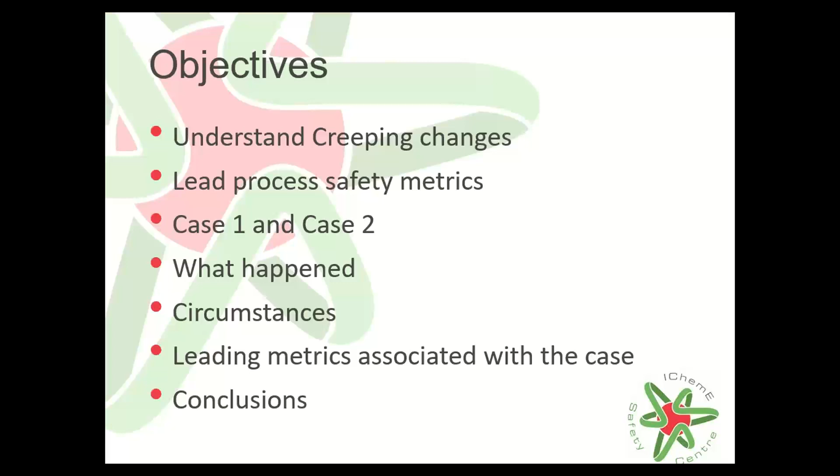And in the end, it's really interesting that I will jump into the details about what can you do as a manager, what can you do as a supervisor or process engineer, and what can you do as an operator. Those learning points are really, really dedicated and focused on these roles separately.

That makes the difference, because when you have any investigation report and all the recommendations, like hundreds of them, obviously you go through them, but be honest to yourself, you forget most of them, except for those of you who have exceptionally good skills and remember everything. Coming from my experience, sometimes I just forget some of the recommendations.

Now, in this case, you can see that, okay, I'm an operator. What is that important issue that I have to pay attention to in this case? So that's the difference, the structured way.

First example - these are not yet the case studies, these are just to set the scene and make you more understanding of what creeping change is about. I don't know if you are familiar with the Royal Air Force Nimrod accident that occurred in 2006, but this is a prime example of creeping changes, and that is an interesting case to see.

What happened: this particular RAF Nimrod suffered a catastrophic mid-air fire, and it was on a routine mission in Afghanistan in 2006, which unfortunately led to the total loss of the aircraft and the death of all 14 service personnel on board. The direct cause was not enemy fire, but leaking fuel being ignited by an exposed hot crossfeed pipe. The deeper causes were, as you can expect, organizational and managerial.

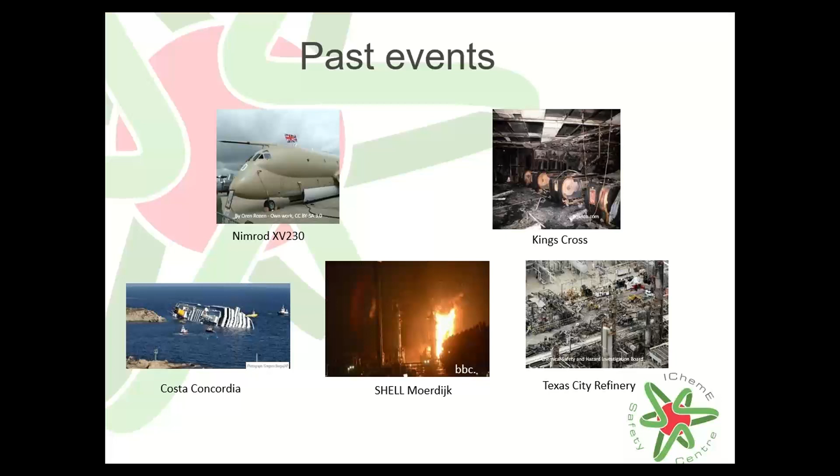accumulated, basically. So if you think about creeping changes, these are a couple of examples, because I could potentially flood you with all these accidents here, but we obviously don't have time for that. Just to give you a hint of what I want to talk about. And if I struggle with words, it's because I'm so excited about this topic.

Apologies for that. And I can give you even a definition if you want, because people really, really like definitions. So what are creeping changes? How can I identify what I'm talking about? This is an accumulation, coming originally from the HSE: an accumulation of minor, teeny tiny changes, which are often ignored or even accepted as the new norm, but which over time can add up to a big change and ultimately lead to a major incident.

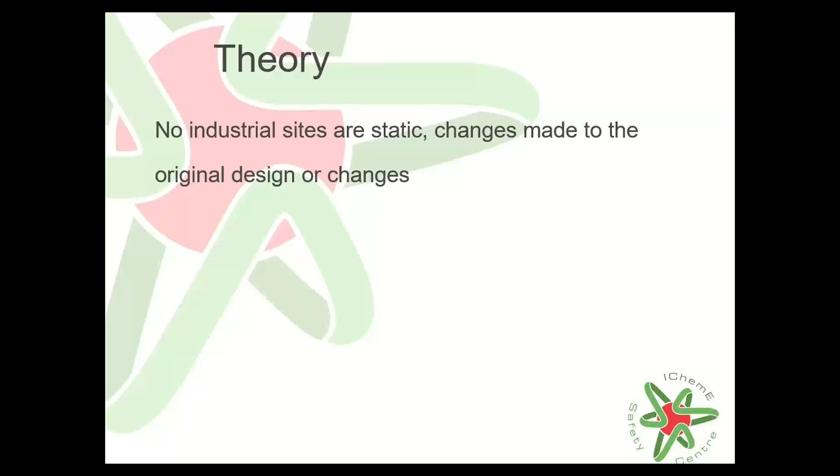And what are the changes we are talking about compared to the original design? It can be because of aging of the facility. Now we have more and more aging assets, obviously, because those industrial sites were built earlier in the 20th century, so they are obviously aging and coming to the end of their life cycle.

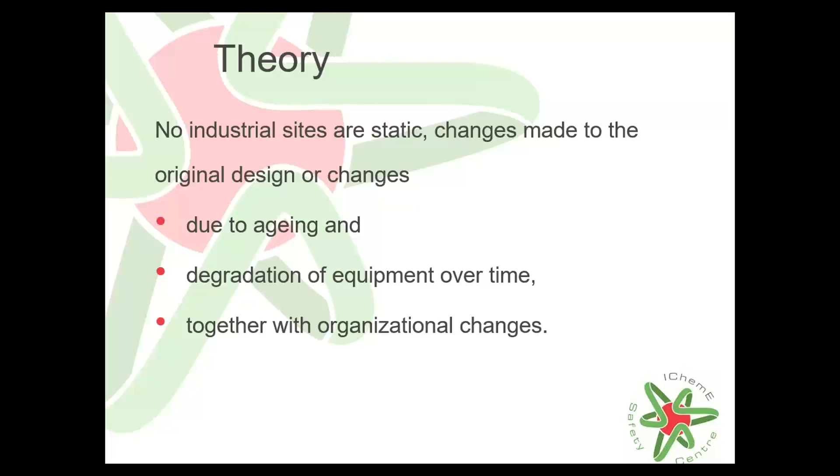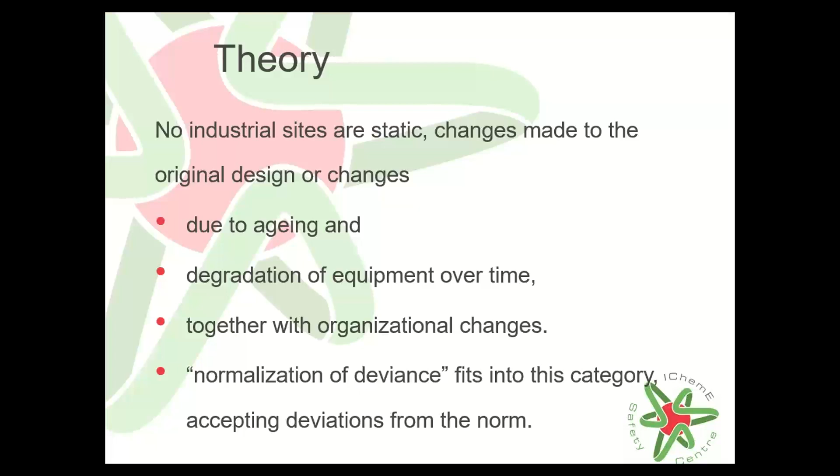It could be because of degradation of equipment over time, together with organizational changes. Mind you, we are not only talking about equipment or technical materials, but organizational changes as well. And I already mentioned normalization of deviance, which completely fits into this category of creeping changes.

Now I'd like to show you the main aspects and features that you can associate with creeping changes. If you'd like, please add your particular features or thoughts around creeping changes to the question box. This can be physical degradation, physical changes to the equipment, to the installation, to the plant.

It could be organizational change, change in ownership. That was one publication recently released by the OECD Working Group on Chemical Accidents, which is a really, really good read. Or when you alter from the original design for some reason, and this is happening basically very, very frequently.

Or you have new processes in place or modified processes, or you are losing skills and knowledge, or hiring new people to your operation. So that could also happen. And there is also an aspect of creeping changes when you change the culture within the company.

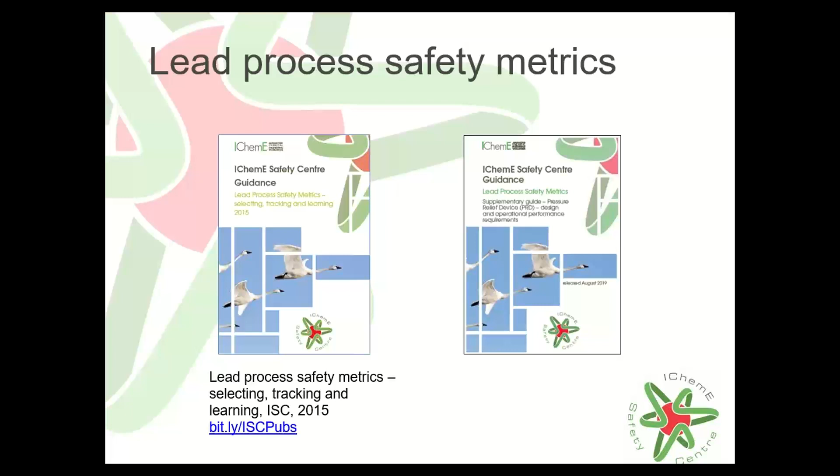This is about lead process safety metrics. And the other guidance document is a supplementary guidance document around pressure relief device design and operational performance requirements. What you can find in these guidance documents is that we work around 6 elements.

This is the 6 pillars, or the framework, by the IChemE Safety Center: knowledge and competence, engineering and design, systems and procedures, assurance, human factors, and culture. We are working around these elements, underpinned by leadership. Leadership is crucial to all of these elements, and there are 21 lead process safety metrics identified.

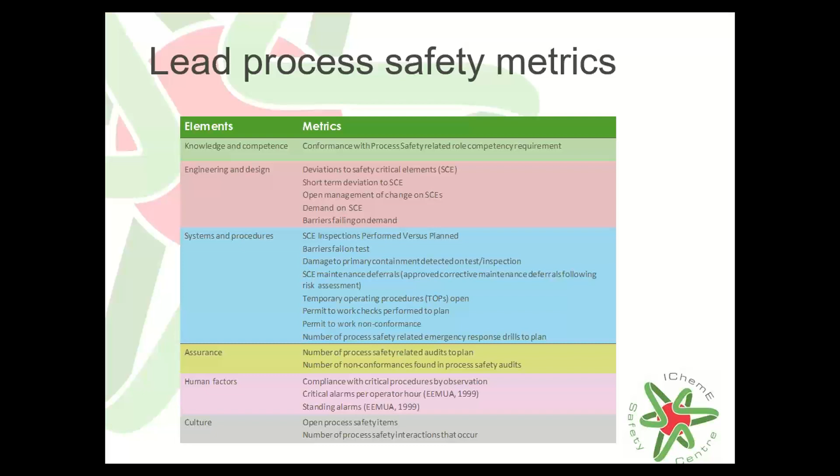Now I will take examples from case studies and show you these metrics, how they can be associated with those circumstances and aspects, if you want to be prepared and prevent future occurrence. And now this is the time when I will be talking about the case studies.

The first case study, as I mentioned earlier, is about a process industrial case that occurred in the FCC unit. So what happened in this case? The fluidized catalytic cracker unit, or FCCU, was shut down following a power distribution failure and was being restarted after an 11-day shutdown.

Now, during this startup, a significant leak of hydrocarbons was discovered, and a vapor cloud formed and ignited, resulting in a serious fire. Workers escaped from the blast, and nobody got injured in this particular incident, which is really good news in this case.

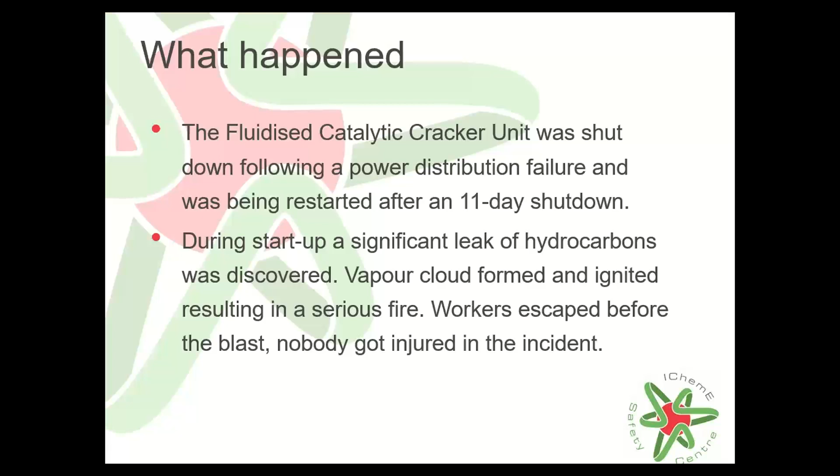Now I would like to guide you through the circumstances - what led to this particular accident. You will also see that I underlined some terms, and I will explain why. So the leak occurred as a result of the failure of a T-piece connection at the bottom, at the base of the debutanizer column, which found a source of ignition nearby.

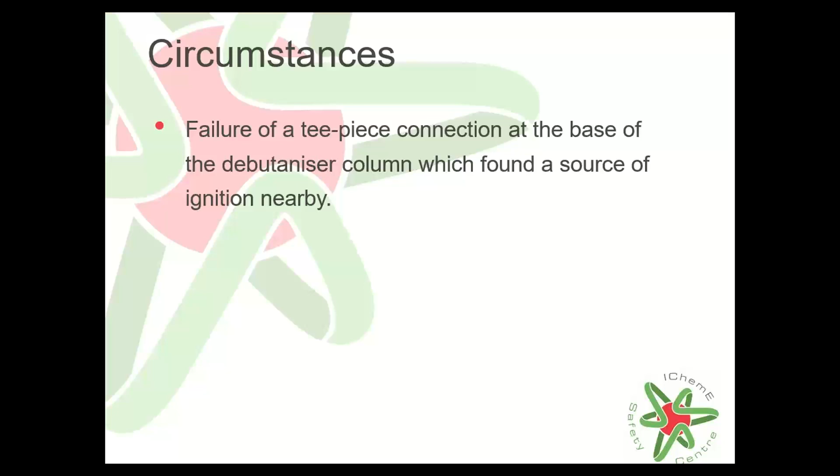The T-piece connection was originally installed in the 1950s, and it was correctly specified. However, it was incorrectly fitted, and it was hidden by lagging. And the other circumstance was that there was no subsequent amendment to the plant layout drawings to identify that particular change, or any change, over the years.

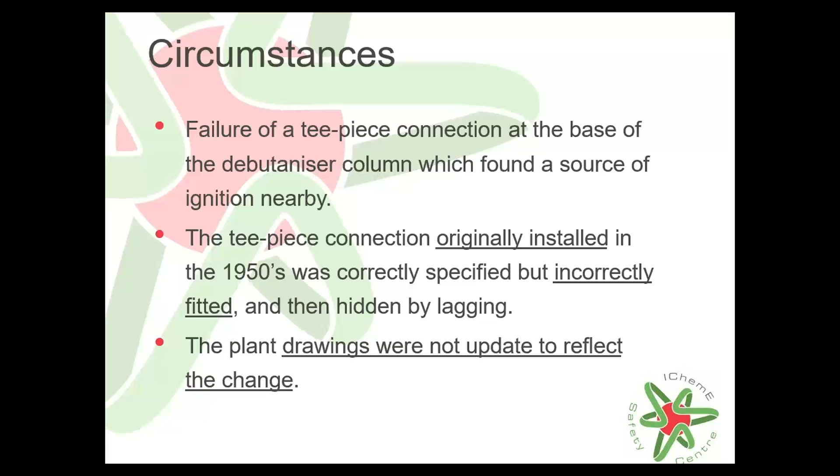What I underlined here was the creeping changes aspect: the T-piece was originally installed but incorrectly fitted, and then there were changes to the plant drawings, but they were not updated and didn't reflect the change.

So what else do we have as we are talking about circumstances? There were a series of modifications since 1986. This particular accident occurred in 2010 or 11, but the time frame shows the first significant modification occurred in 1986 - the pipework at the base of the column and a valve was removed.

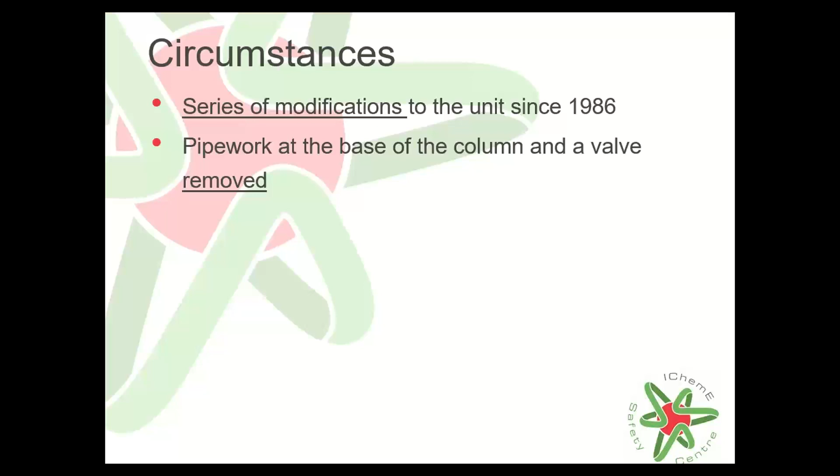Prior to that modification in 1986, other changes had been made to the system. One of them was that pipework at the base and the valve was removed, which ended up in inadequate support for the remaining pipework and the T-piece connection. So that resulted in this change, and this resulted in this that happened.

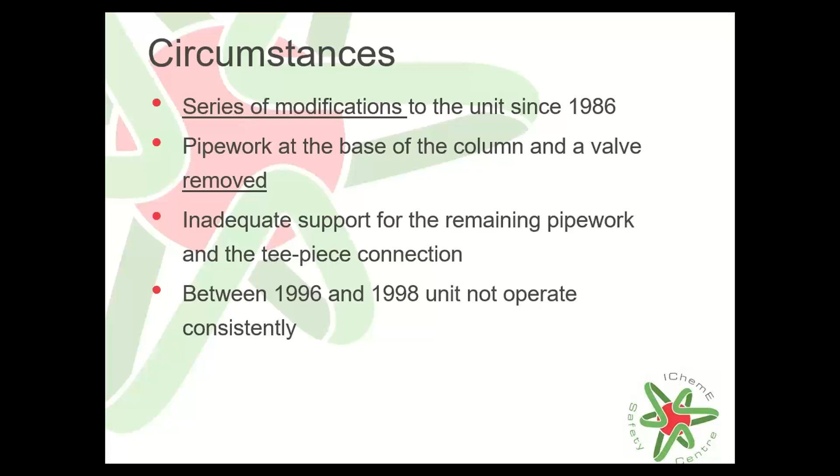Between 1996 and 98, the unit had experienced considerable difficulties when they started to start up and shut down. Because the unit didn't operate consistently, they had to increase the number of startups and shutdowns. There were also additional vibrations and cyclic stresses, because during startups the whole process is under really high pressure and temperature - all circumstances at startup are extreme, which contributed to cyclic stresses and vibration. So you can see some aspects of creeping changes, or changes that were really subtle.

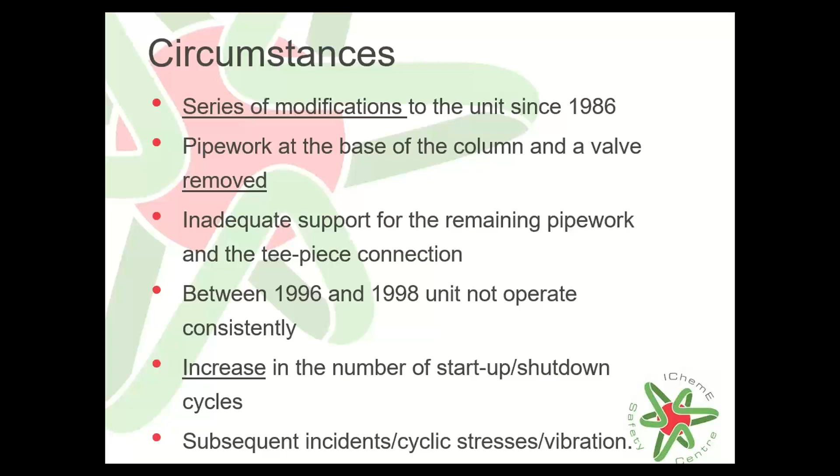A valve here removed, a series of modifications that may not have been identified in the management of change procedure, or there was no management of change procedure, and no risk assessment associated with it. The underlying cause is also the increase in the number of startups and shutdowns.

But what else? Eleven weeks before the incident - apologies, this one occurred in 2000, but a similar one in a similar facility occurred in 2011 that I was referring to, very very similar. It's really scary how similar that was. That's why I mentioned earlier 2010 or 11, but this particular case occurred in 2000. However, the timeline is still quite significant.

Since 1950, the originally designed or fitted T-piece has been modified. There were several changes starting from 1986, and now here we are in 2000. Eleven weeks before the accident, there were 19 startup attempts, but only 7 were successful.

So failure of the T-piece connection pipework was probably caused by a combination of the incorrectly fitted T-piece connection and the inadequately supported pipework. This was a top-tier establishment according to the COMAH regulations or the Seveso directives, and the safety report didn't reflect the current situation. Incidents previously occurring as a result of vibration of the transfer line were not reported nor investigated. And there was an ongoing construction within the site of a new facility.

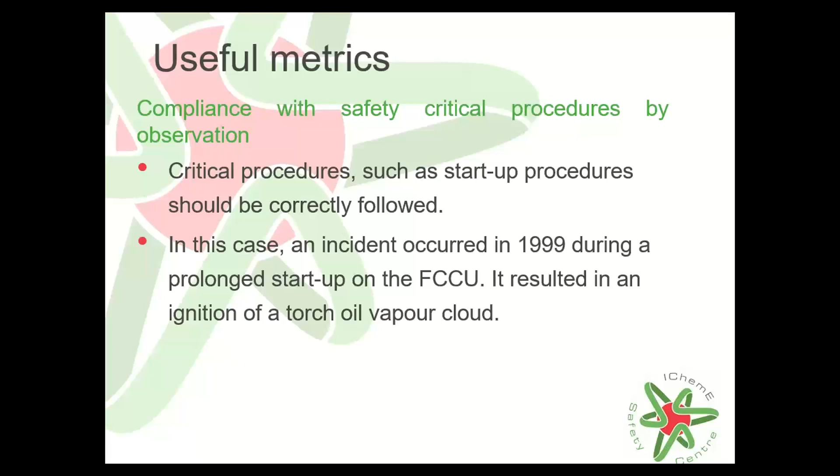For instance, critical procedures such as startup procedures should be correctly followed. In this case, the incident that occurred in 1999 was during a prolonged startup, resulting in an ignition of a torch oil vapor cloud. Contrary to planned operating instructions, the torch oil was admitted to the regenerator when the unit was at too low a temperature.

The plant actually was a really good plant in terms of having many solid procedures in place. Yet the operating procedures were for some reason ignored by staff.

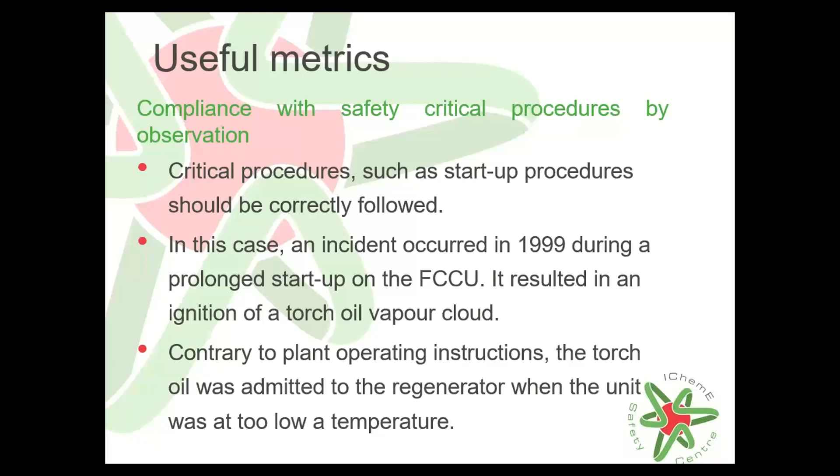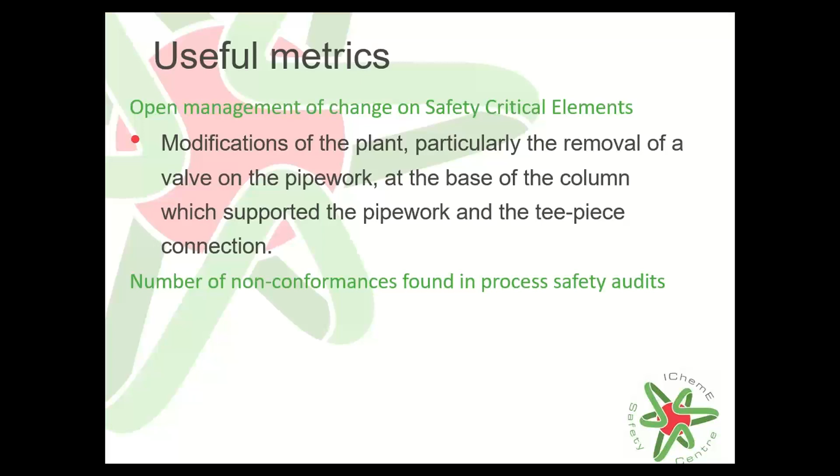Another metric that could be useful would be the number of non-conformances found in process safety audits. You can find this in many other case studies. For instance, the Texas City Refinery explosion, where previous process safety audits highlighted some of the problems which were not addressed by management.

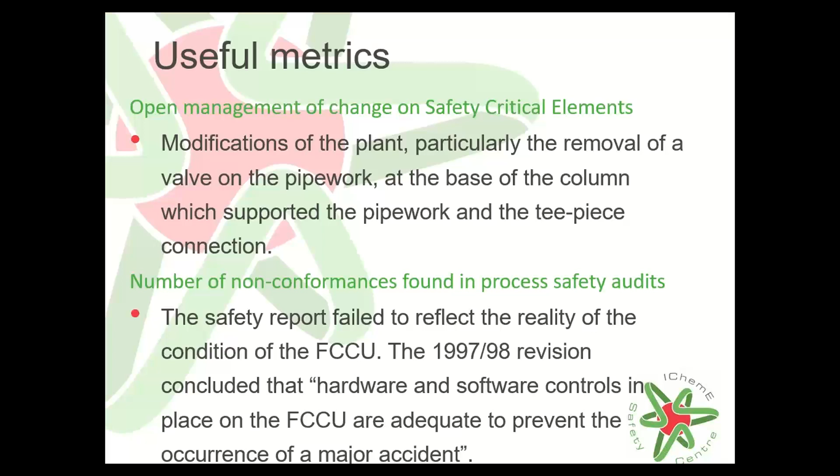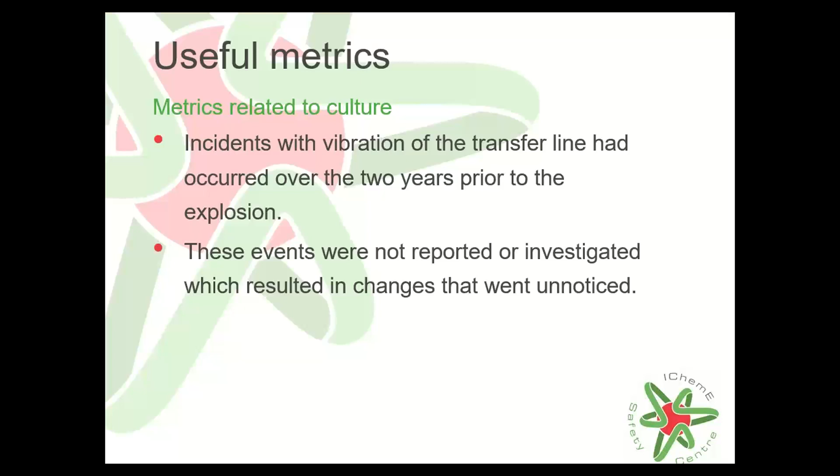Metrics related to culture. Remember, I mentioned earlier changes in the safety culture. There were incidents, and these incidents were not investigated or reported, which means the learnings were not communicated or implemented within the operation. The company reviewed why the unit had struggles to find out more about why it didn't operate properly, but these findings were never implemented or communicated properly.

So this is the first case study, related to a process safety incident. I know this is really close to most of you, because this is what you work within, and this is the environment you are familiar with in this operation.

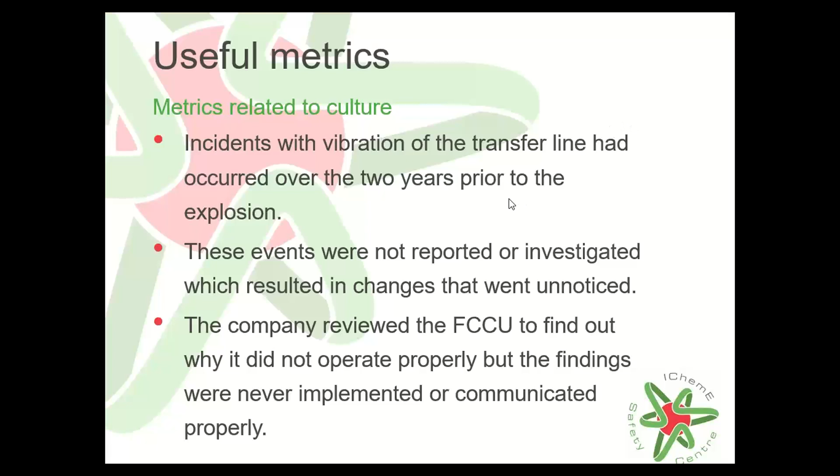Now, as I mentioned earlier, I will have a second case that has nothing to do with process safety, and if you are ready, I would like to start with that particular case.

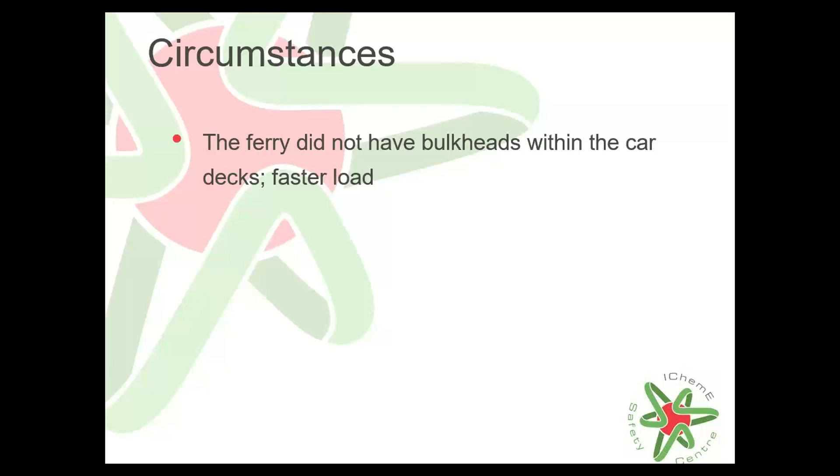When the water entered the ship, it moved to one side of the deck, so the ship became unstable. Most ships had divided hulls, but Ro-Ro ferries tended not to because of the difficulties of loading their cargo and the desire to maximize loads. So the Parliament Act required divided hulls, but lobbying resulted in it being repealed.

This is a change that is indirect, but it is a creeping change - the lobbyists managed to escape from that Parliament Act that required a divided hull, which had an overall impact on how the ship behaved in this particular case.

What were the other circumstances? The assistant bosun, whose job was to close the bow doors as the ship left harbor, had fallen asleep in his bunk. He was really overworked and exhausted, and missed the loudspeaker warnings that they were about to depart, and therefore was missing from his station to close the doors.

The bosun was on the main deck, but he didn't consider it his duty to close the doors.

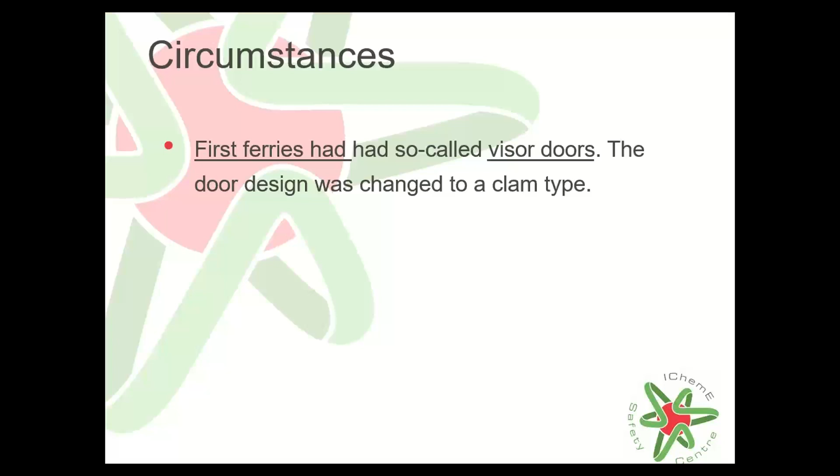Sailing with open loading doors was an identified issue. Everybody basically knew about that; sometimes these ships sailed with open loading doors. Therefore, captains asked for indicator lights for these Ro-Ro ferries to be installed. So they asked the management, but their requests had been ignored.

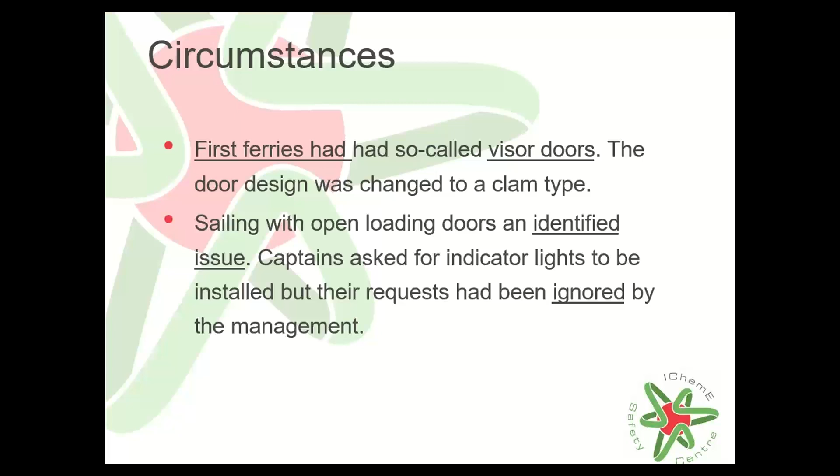A recent change in ownership - here is what I mentioned around that. The holding company had only owned the company for a few months before the accident occurred. There was also the aspect of carrying excessive numbers of passengers, 10 to 20% more than the loading limit was, so more passengers were carried than life-saving equipment supplied. And what else? Three crews and five sets of officers were employed, but there was no consistency in the duties. So there were always new people coming around, not aware of the procedures, and there was no consistency.

After that, we have seen these circumstances. I quickly want to go through, because time is limited, what are the leading process safety metrics that could be associated with this case and can be learned from it. If you think a little bit broadly, just out of the box, what are the aspects? I've identified some myself, but you can identify more because the report on the Herald of Free Enterprise is available for everyone for free. If you're interested in going into the details, I'm pretty sure you will find more aspects as well.

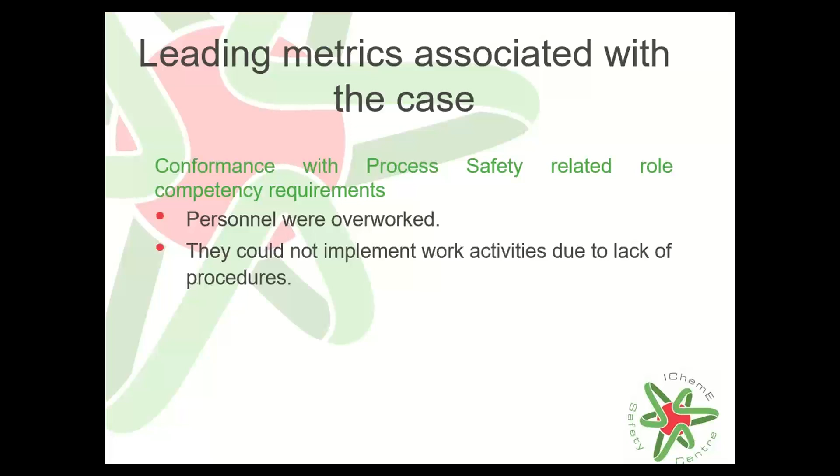Conformance with process safety related role competency requirements: personnel were overworked, they couldn't implement work activities because they didn't have procedures in place, and of course there was always a change in the crew, so there was no consistency, as I mentioned earlier. Therefore, I would question the competency, because if you are not familiar with the ship you have duties on, it can have a certain impact on how you operate or work in that particular place.

What else? Engineering and design. A high number of failures upon demand indicates an engineering design issue and improvement needed in the effectiveness of inspection and maintenance of the barrier, or to determine if the demand frequency matches the design of the protection loop. The lack of divided hulls, for example, is a lack of barrier in place in this case.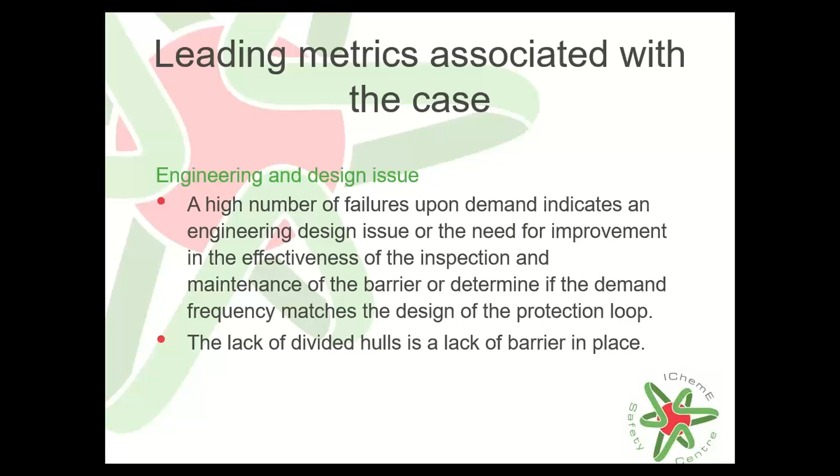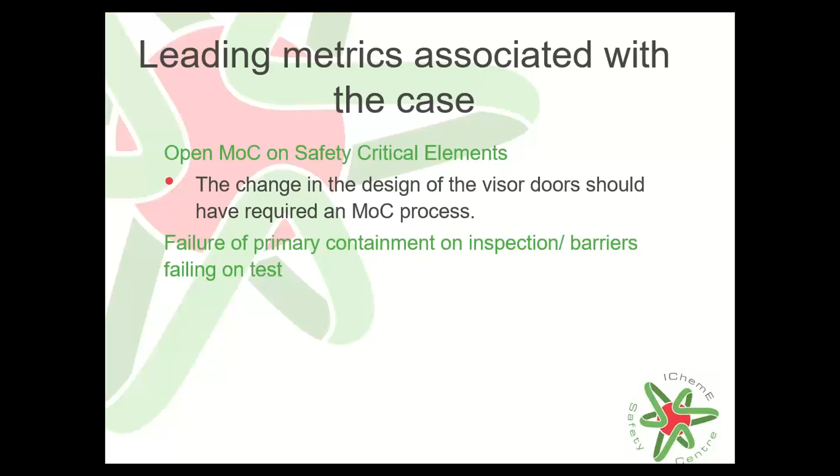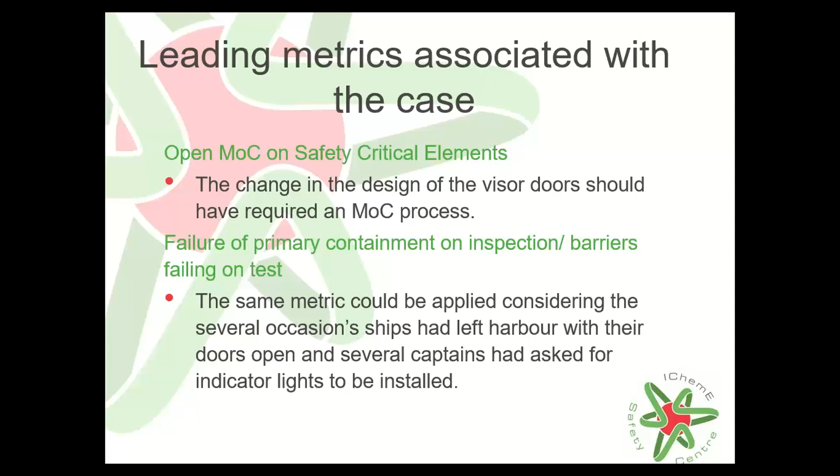Open management of change on safety critical elements: the change in the design of the visor doors should have gone through a management of change process. And failure of primary containment on inspection, and barriers failing on test - the same metric could be applied considering the several occasions ships had left the harbor with open doors, and that captains asked for indicator lights to be installed. So these are the lead process safety metrics I could think of and associate with the Herald of Free Enterprise case.

Now we have reached the point where I guide you through the 'what can you do' session. These are recommendations focused on typical roles which are applied for management, process safety engineers or supervisors, and operators. I also published a Safety Lore PDF document that can be downloaded for free from our website on creeping changes.

There you can see the first case study in detail, and also you can find the podcast about that Safety Lore uploaded to our website as well. Now, in general, when I prepare these 'what can you do' sessions, I gather more accidents, so that I don't base these recommendations only on one or two case studies, but many, many more.

Normally, I take the examples of like 10 to 20 case studies that I research, and then find similar findings and similar recommendations that can be applied in the industry.

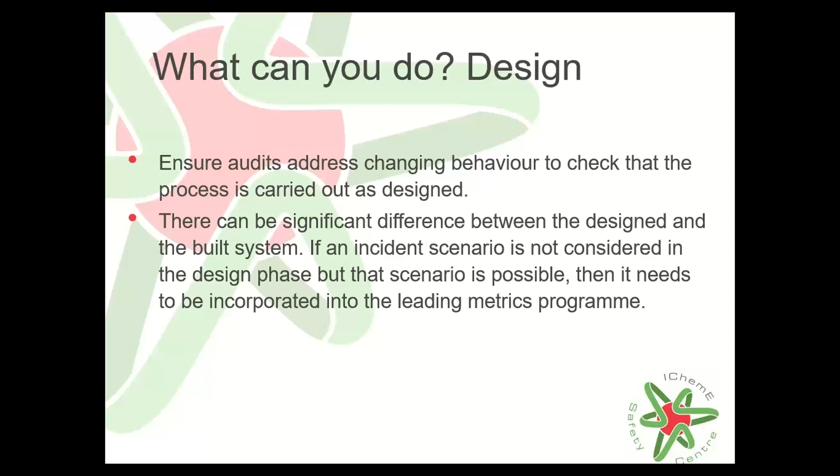If a particular incident scenario that you identify is not considered in the design phase, but that incident scenario is still possible, then it needs to be incorporated into the leading metrics program, should you have one in place.

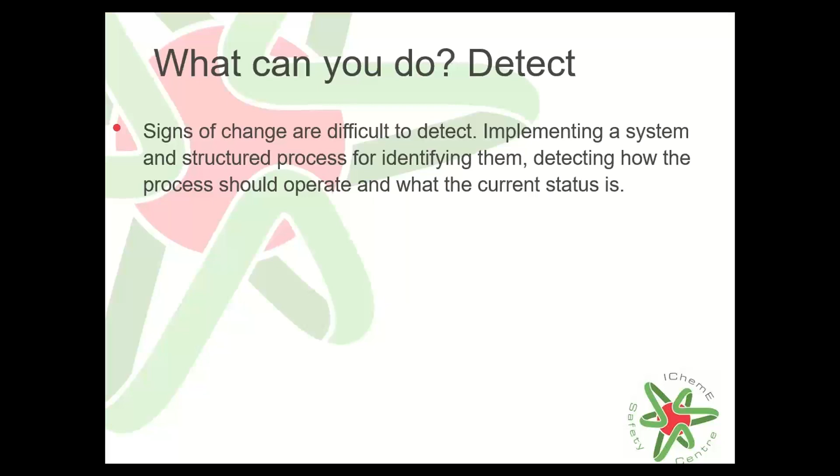How to detect? What are the signals of the change? Really, really difficult to detect. So try to implement a system and structured process for identifying those changes and detecting how the process should operate and what is the current status. If you know where you are at the moment and how you should operate, then you can see the deviance between the two, if there is any. If there is none, then everything goes around and goes with how you should operate.

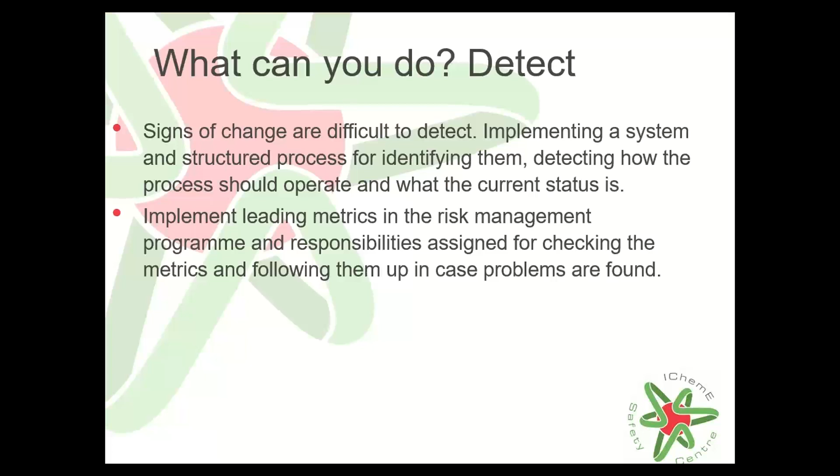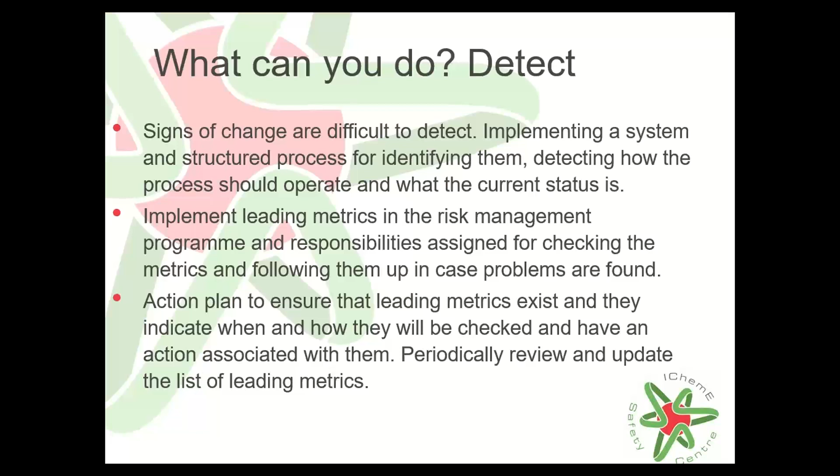Try and implement leading metrics in the risk management program, with responsibilities assigned for checking those metrics. It's not just about gathering metrics to have them, and it's not about the number, it's about the quality of those metrics, and whether you know why you are collecting information on certain metrics. An action plan should be followed to ensure that these leading metrics actually exist - not just on paper, but really tried, tested, reviewed and updated when necessary.

What to do about incidents? Try to ensure that change is detected. Even small ones are documented. Near misses, for instance, can be a signal for a big catastrophe.

In case of an incident, check if you already had leading metrics in place, or whether they were missing, or whether they were not performing well, and why they failed if that was the case. Try to have effective action on that, and analyze why there was no effective action taken so that they could fail.

I already mentioned the near-miss events that I highly encourage you to identify and investigate, as they can be precursors to a major incident. Remember, in the Nimrod case, over 23 years, a fourfold number of leaks occurred. If you think about other major incidents or tinier incidents, you can see the same pattern over the years, that they can be overlooked over time.

What about costs? Make sure that costs do not impact safety and do not threaten plant integrity. And make sure, also related to costs indirectly, that process knowledge is maintained and transferred. It's a sensitive topic, I understand. Costs are always sensitive topics, especially for engineers.

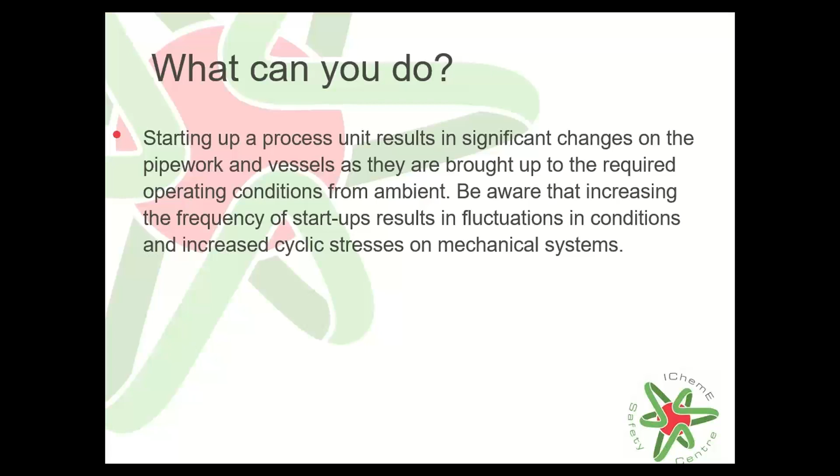When you start up a process unit, it can result in significant changes in the pipework and vessels. I talked about it in terms of vibration and fluctuation in conditions that increase cyclic stresses on mechanical systems.

Try to pay attention to these signs of normalization of deviance, where operators might just skip one or two steps from the procedure, or they just ignore the procedure, or they just bypass it.

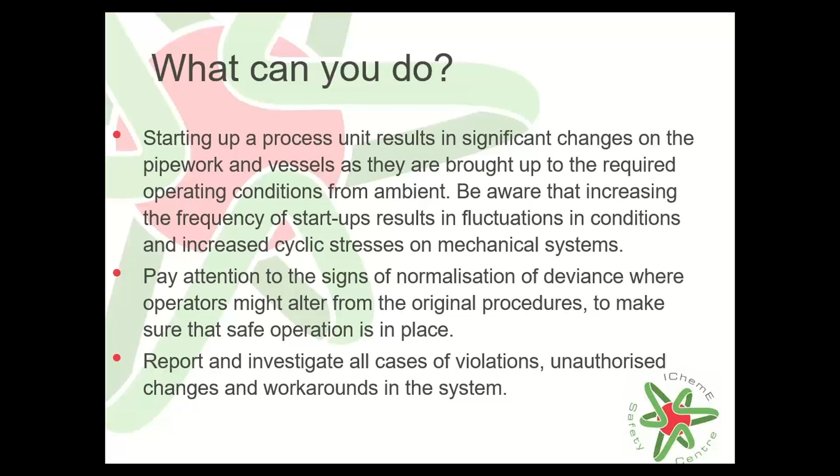And report and investigate all cases and try to communicate the findings of those results. Finally, we have reached a point where I can show you what you can do as an operator. You can make sure that you follow the operating procedures, maintenance procedures, and emergency procedures, and never deviate from them unless the procedure is wrong.

I get this from time to time, that yes, operating procedures may not be perfect. Just be aware, try to follow them, and if you see that it has some failures in it, then try to tell it to the supervisor and discuss this with them. Report any damage or irregular event immediately. And as I mentioned earlier, if the procedure cannot be followed, then report it and find a solution.

I'm pretty sure you can have more of these, and obviously you can, because if you research more on this, the creeping changes, then you will find more and more information. For instance, if you go to the website of the Energy Institute, they have published a very good guidance document on hazard identification of creeping changes, published back in 2010, and I would highly recommend that publication to you.

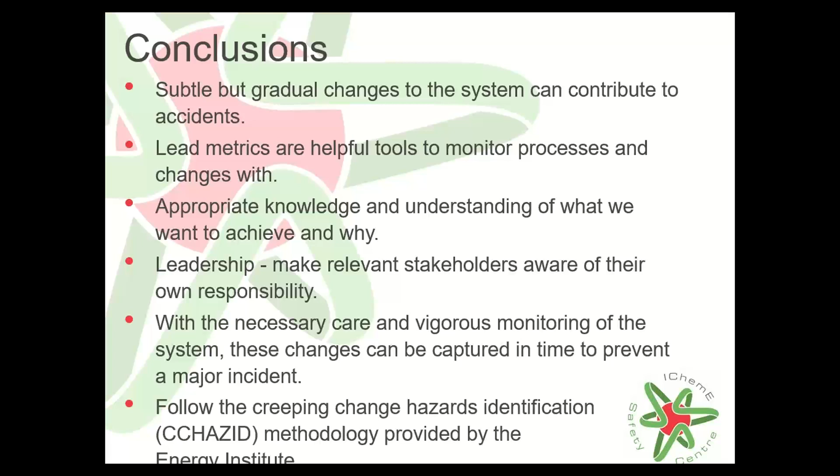And now I've run a little bit over time, but I'm happy to take questions. I think that we have like 5 to 8 minutes to take questions for the webinar. Yes we do, Susanna, sorry I ran over time. No worries, just one second.

Thank you very much, it was a very engaging talk. If you send the questions either to Courses or Safety Center or Christiana, then I will be able to respond in more detail. Okay, brilliant. Thank you very much, Susanna. That was a really great talk.

And we have some really good comments and questions here. I think some of the questions you might have answered as you went through the presentation, and some excellent comments around change, around savings, and the impact of COVID as well on reduced work numbers, and how that can impact increased maintenance backlogs. The one question here that I think was quite interesting was about the robustness of root cause analysis, especially with regards to the first case study on the FCCU unit.

The question is from Ian Welburn, and his point is the TPs remained an unrecognized component after so many restarts. I wondered if you could speak or comment on that.

Yes, thank you so much. This is a really great question because, as I mentioned but was really brief about, it was covered by lagging, so nobody could actually see the TPs and its condition over time. I don't remember exactly the details of how they finally discovered it. I think it was only after the incident, but unfortunately that was an aspect that contributed to the accident, that it was hidden by lagging. I hope that answered the question.